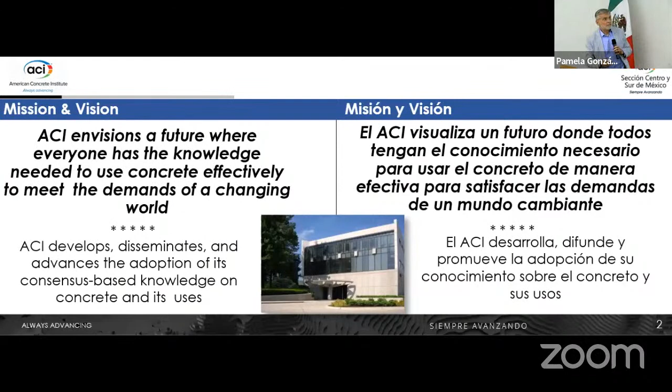ACI is a technical society. We are not a trade association. Even though I have lots of friends who are in the cement or concrete business, and actually I thank them for their support, we are not pushing concrete as a material system. We push knowledge. This is what makes us different from other groups.

We are not a government agency. You are part of an organization that is all about generation and deployment of knowledge. So this is fundamental for me, and this is really what excites me.

Maybe this is one of the reasons I was mentioning to the students, I've been attending conventions since 1985, and I only missed one. So I invite all of you to Boston. It's a great city, it's going to be during Halloween. It's not a bad place to be. And the weather is going to be a little colder than here, but maybe you can see the first flakes of snow there in case you have never seen one.

It's a big institute. We have 18,000 members, 18,000 plus, without counting the members of the chapters. If you're a member of the chapter and not a member of the main organization, we don't count you as a number, but you are still there and you're a key representation of what we do as an institute.

We also have 15,000 students as members, and membership is free, not because we're generous, but because we recognize the fact that the students are the future, not only of the institute, but of the entire industry that we represent here. Just to give an idea, we have just about 350 student chapters and more are coming. So we are very excited.

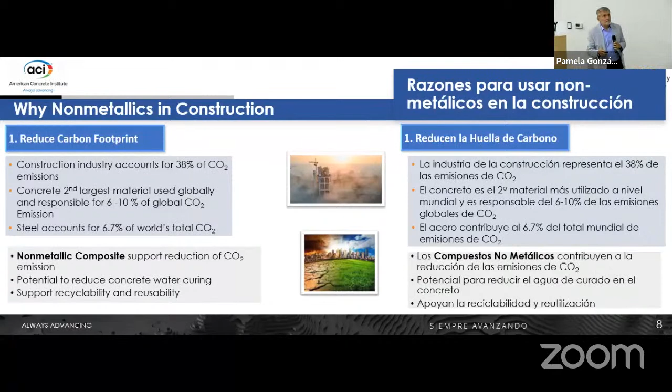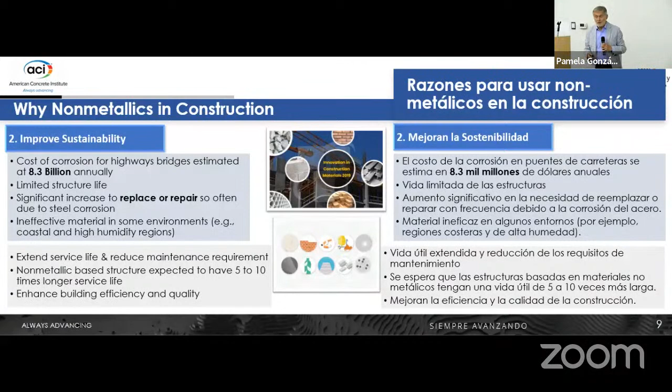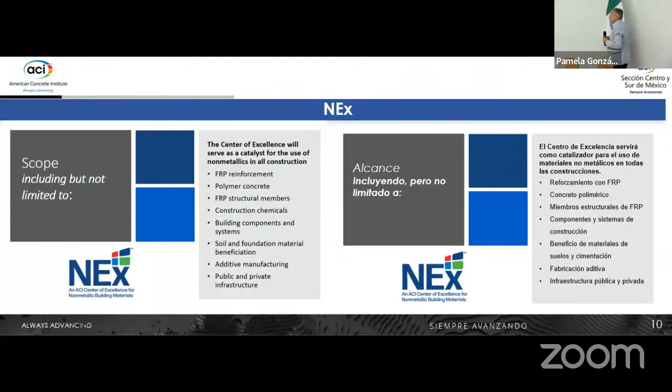So this is one of the reasons why we think there might be room for materials that are different and will allow us to build with a service life of 120 years, which is our objective right now. This center of excellence called NEX not only deals with composite rebars - what we call FRP reinforcement, my personal passion - but also polymers in concrete, additives, construction chemicals, soil materials for soil amelioration, all the things that non-metallics can do. So it's not just that.

The other thing that I think could be exciting, if there are academicians and students in the room, is that through the center membership, we fund research. Last year, we had 12 projects and invested close to $600,000. This year, we are close to $750,000.

Yesterday there was an announcement, if you receive emails from ACI headquarters, that said we opened up a request for application, a request for proposals on 13 themes related to non-metallics. Everybody can contribute, you don't have to be in a research unit. You can be in industry, a contractor, an engineer, or obviously in academia.

The second one, in terms of age, came after NEx, and is called NEU. Here the theme is, I think, perhaps the most important issue we are facing today as a society, not just as an industry but as people, as consumers: a Center of Excellence for carbon neutral concrete. So here are the efforts we have. Are we doing research on this theme in this center? Not really.

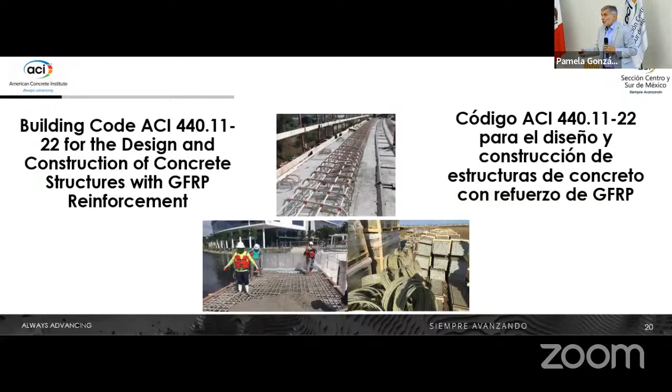And actually, I'll tell you even more. Two weeks after ACI published this document, after a major effort, ICC, the International Code Council, decided to adopt it in IBC, the International Building Code, the Model Code. This means that this document will be part of the law of the land in the United States because the 50 states use the IBC as the model code. So in any country using the model code, this is also the law of the land starting next year. So why do we do this?

I mean, it's kind of obvious, like I already mentioned. We have used many ways to slow down the degradation of reinforced concrete. We have looked at additives, additional cover, we put membrane, we have coated the steel, but corrosion unfortunately happens. It happens because we have chlorides entering the concrete, and because of carbonation of the concrete, among other reasons.

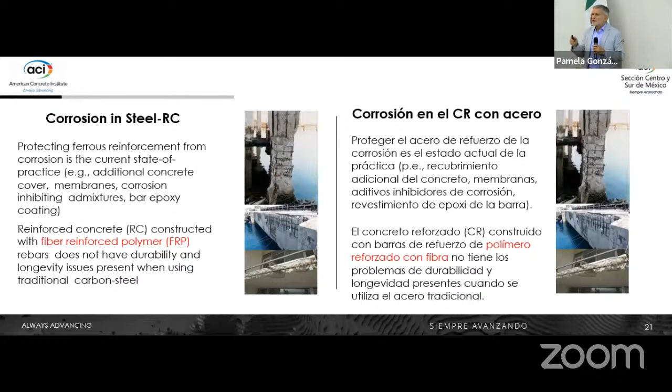So now we say, well, why don't we use these FRPs, fiber reinforced polymers, to give us a solution? It's going to be another tool in the toolbox. Today we are using primarily, at least this code speaks to, material systems made of E-CR glass fibers, which are corrosion resistant electric glass type. We're using a thermoset that is a vinyl ester, but the new ASTM will also open up to other material systems.

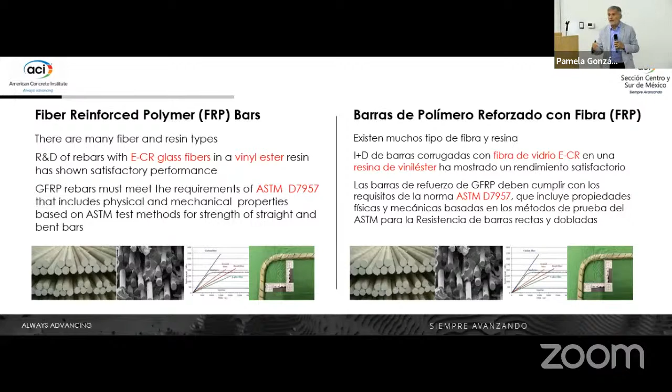But today, the 440.11-22, the code that we issued last year, refers to a material specification that is D7957. So now we are blessed by the fact that we have a material spec, we have a code, and also we have another document, 440.5, that is a construction specification. Material, design code, construction specs - we have closed the circle.

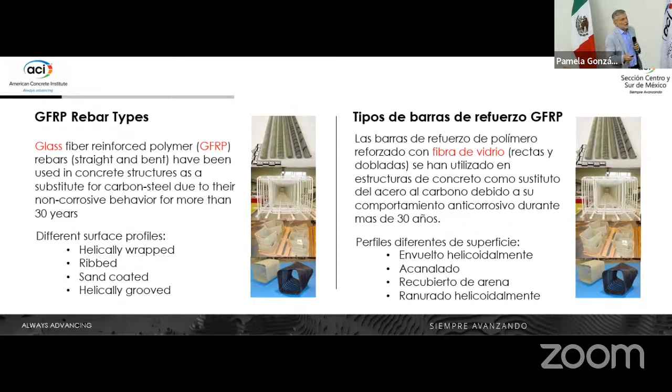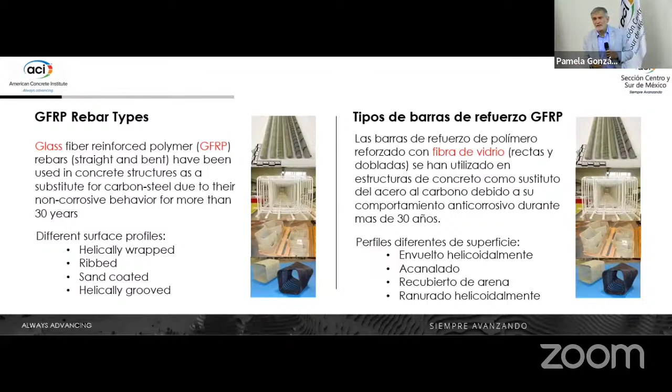The bars kind of look different from the ones you are familiar with. They all look different depending on the supplier, because these manufacturers have not standardized the surface configuration. But all these bars, if compliant with the ASTM D7957, provide adequate bond.

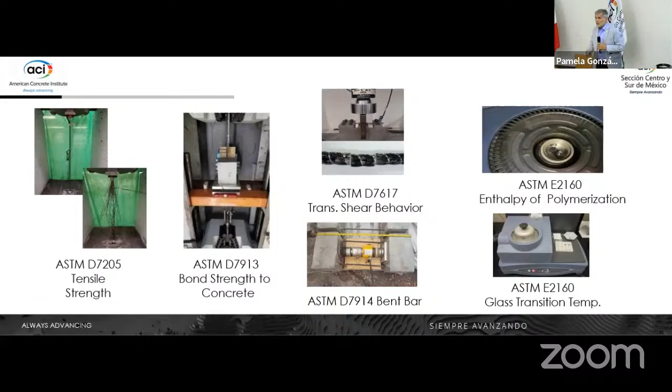In order to make sure that these elements are consistent or compliant with the code, we run a series of different tests, and I'll list some of them. Some may not be familiar to civil engineers, like enthalpy of polymerization. What does that mean? Well, in simple words, if you're baking a cake, you want to make sure that it's cooked - that's the enthalpy of polymerization. Because if the polymer is not fully polymerized, it will absorb water and you will lose the durability that otherwise you would have with proper cure.

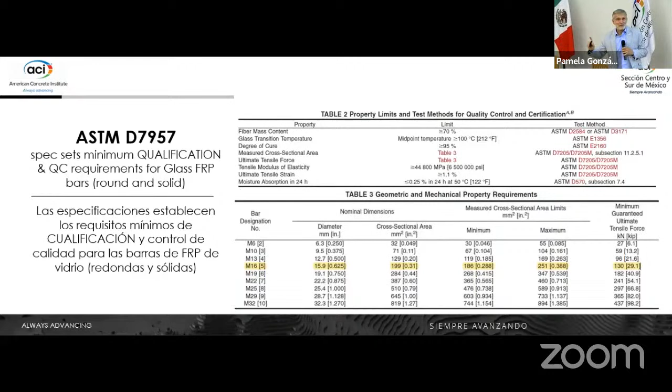This ASTM D7957 prescribes many things, including the size of the bars. So not only the strength, not only the constituents, but also the dimension of the bars. I could spend the afternoon telling you why, but I'll skip it because today I'm emphasizing the good part of FRP, and maybe you will ask some questions about the challenges.

It's a material that has high tensile strength but is less stiff than steel. Let me just use a number here - if you think of steel, FRP gives you a stiffness that is a quarter of that. The implications are significant in terms of serviceability, but we can live with that. In terms of strength, if you take a grade 420 MPa steel, the bread and butter of our industry, we have a strength that could easily be 2.5 times that, but the stiffness is less.

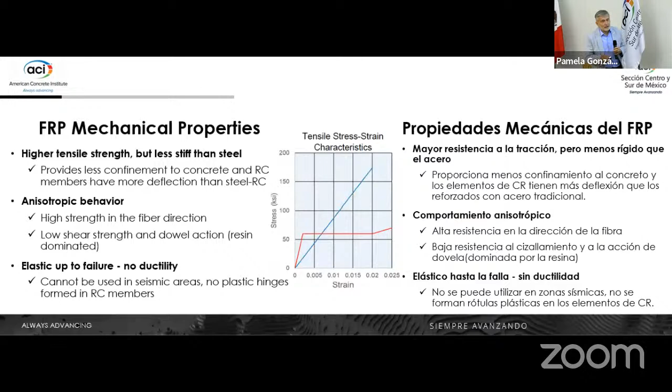It's a material that is anisotropic - properties in two directions are different. And there's a very important property: it is elastic to failure. These have implications, which I'll show in a second, if you go into seismic design, that is obviously of significance. The strength of the bends is less.

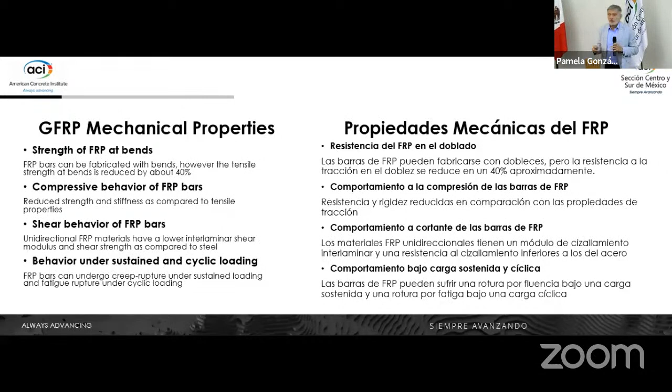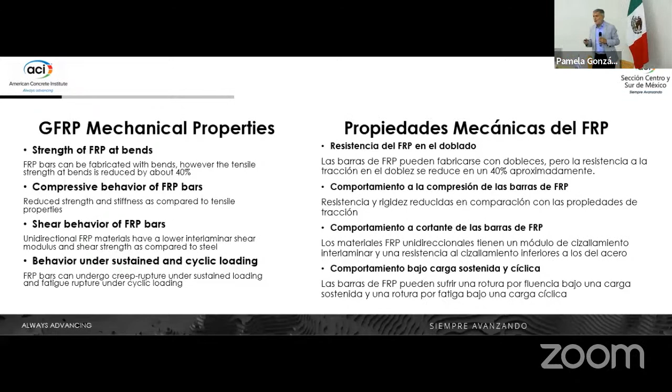This is perhaps one of the weakest points. The compressive behavior is also less than the tensile, and the shear behavior is different than you're used to with steel. Under sustained load and cyclic load, we have a phenomenon called creep rupture. What is the point I'm trying to make? Nothing is perfect, but as engineers, we can design and we know what these properties mean to us.

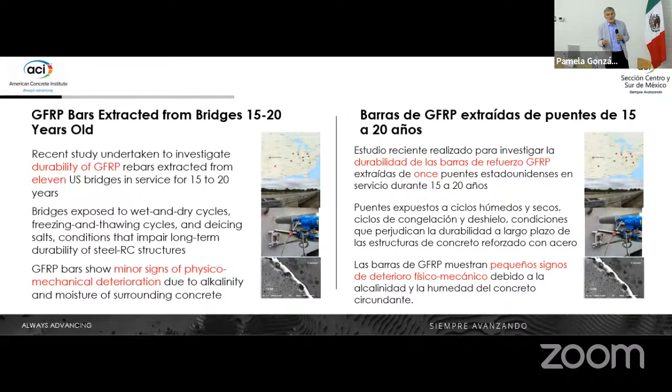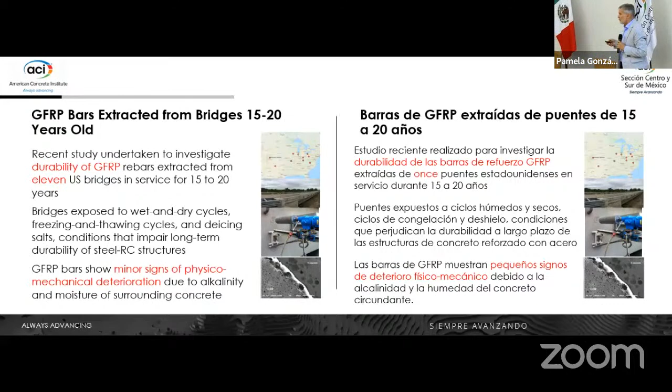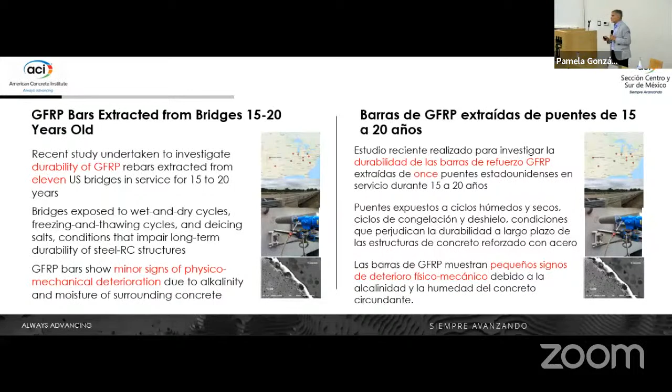The other thing we have done over the years, because there was a question about durability, we have run tests on samples that came from bridges that had been in place for at least 15 years. We have demonstrated that there is really no degradation of the GFRP bars, even though in those days the fibers were E-type, not ECR, and in many cases they did not use a vinyl ester, they used a polyester, which we no longer use.

So this is the code. It's a great document. I hope that you will eventually put your hands on it.

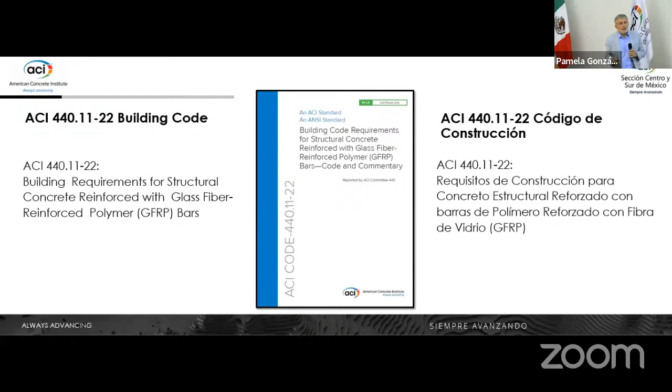It's relevant because it will open up a new set of opportunities for both designers and contractors. As a code, the primary objective is minimum requirements to guarantee safety. This is the objective of every code.

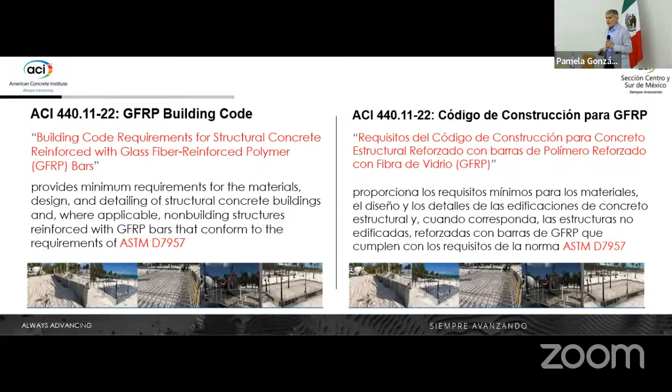As mentioned before, it is related to bars that conform to the requirements of D7957, so compliance with the material spec is a requirement. If there are bars deployed in Mexico that you'd like to use, ask the supplier if there is compliance with ASTM D7957. If not, you should not use them.

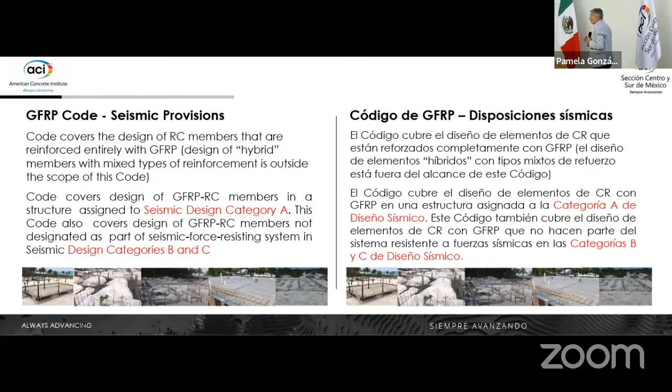The material is linear elastic to failure. When I was with Professor Alcocer this afternoon at UNAM, I said this seems to be a problem, but it's not really a problem. Not always is ductility what we really need. There's a movement noting that ductility resulting in very high levels of damage after a seismic event presents dramatic challenges for repair and rehabilitation. So designing with materials that are linear elastic could open up a new world of opportunities for us.

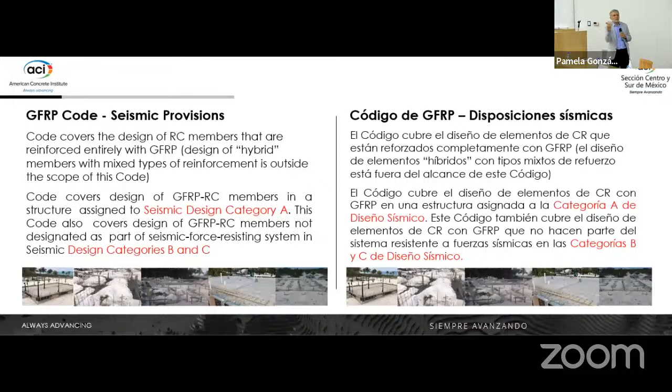But as of today, we recommend using this only in seismic zone A, the one with the low level of seismicity among the four seismic zones, A to D.

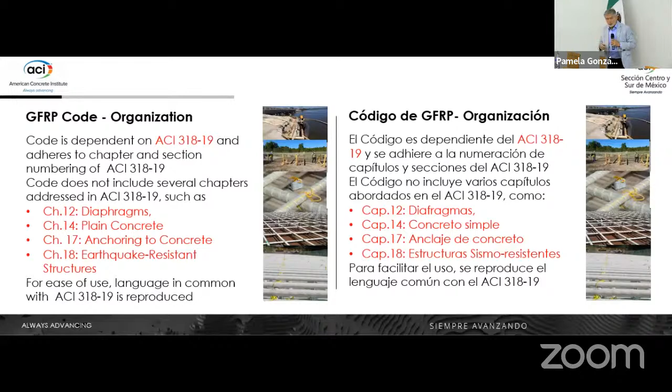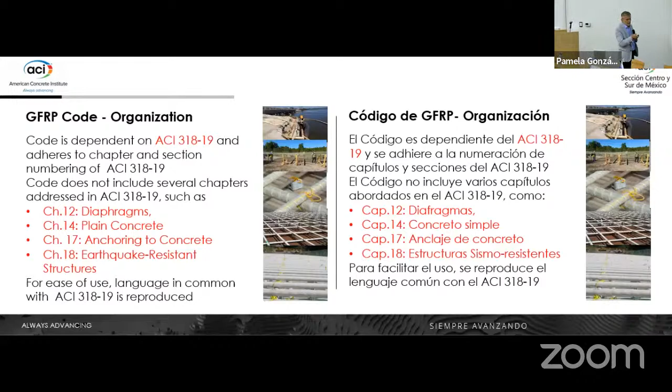The code covers the same structure as 318 for those familiar with it, but skips some chapters. I'll mention two. Diaphragms: we don't have enough knowledge about diaphragms, there hasn't been sufficient research on it, so the code is silent on it and will say not applicable. And plain concrete, which is already covered in 318 - why rewrite it? So this is not a limitation, but something you need to be aware of.

I want to stay on this issue of ductility, but we're now thinking in terms of deformability, giving the same premonition to failure with deformation rather than plasticity. We've calibrated the safety factors, the phi factors, the strength reduction factor, to give us the same reliability that we have with conventional structures.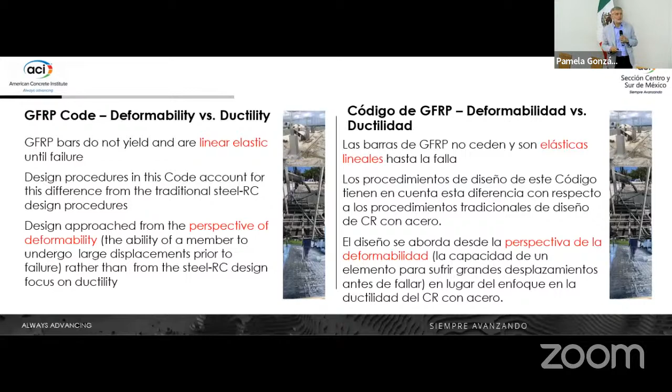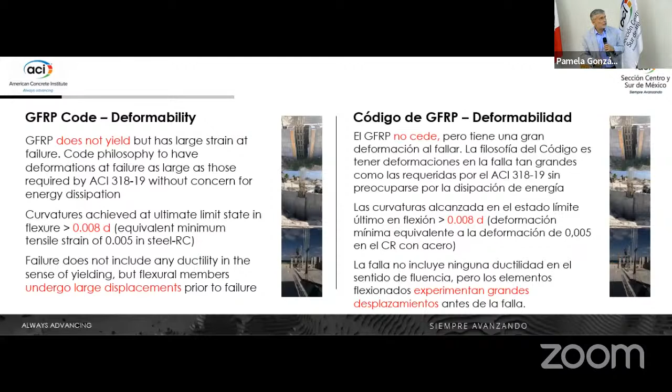I'm not going to go into details here, this is more for the designers, but I want to make sure you understand that even though the materials are linear elastic to failure, the safety remains the same, if not higher, than in the case of traditional structures.

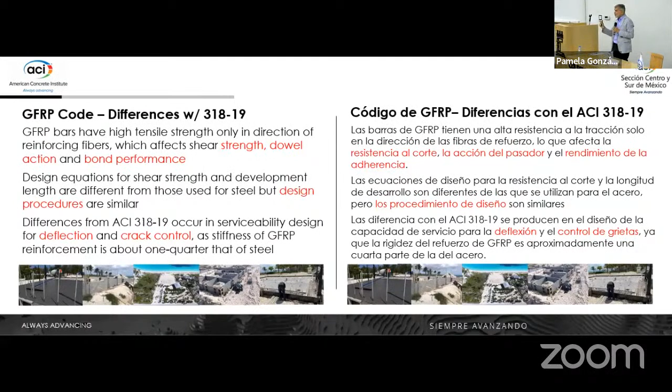I mentioned differences. When you design with FRP, you need to be aware of some peculiarities of the system, in particular items like shear strength, dowel action, and bond performance. And because stiffness is less than in the case of steel, serviceability in terms of deflection or crack width could sometimes be an issue.

The last item: in order to be accepted by ICC as part of the International Building Code, we became silent in this version of 440 on the issue of fire resistant ratings. The reason is we did not have enough tests conducted according to ASTM E119 to present to the building official. This type of work is going on right now.

In some instances, the performance of a GFRP RC structure is better than one with steel RC. Why? Because at 400 C, the stiffness of steel is gone - the E of steel, the modulus of elasticity, goes to zero or decreases significantly. If you have a structure reinforced with GFRP, what happens at 400 C? The resin melts or degrades totally, but the fibers are not degraded. So if you have continuity in your structure and reinforcement, and you anchor the reinforcement, you remain intact. We're doing work in tunneling that is really amazing in terms of safety under fire.

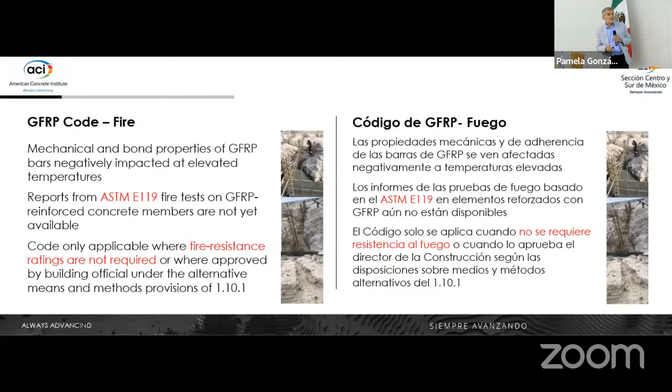So this is not a challenge, I see this as an opportunity. The only other thing I want to show is that we are so conservative now that we even apply a reduction factor, what we call C sub E, to the value of the guaranteed strength that comes from the supplier. By the way, that guaranteed strength is the average minus 3 sigmas - let me repeat, the average minus 3 sigmas.

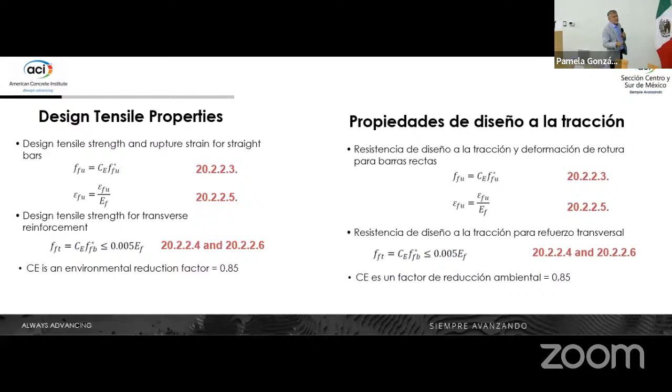And to that, we also apply this C sub E factor that in the case of the new code, we move it from 0.7 to 0.85.

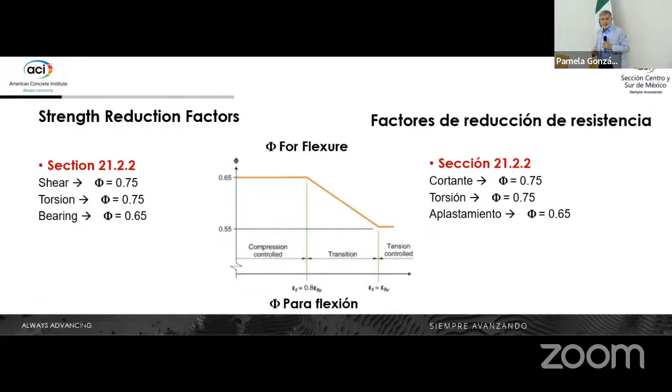The phi factors, and that's the last one on the technical side: we go from the conventional zero in flexure... in shear it's the same, but in flexure we go from 0.9 down to 0.65, and 0.55, also because we allow failure in compression, which is unheard of in the case of flexural elements. Obviously, we allow failure in compression in columns, and that's why the phi factor in that case is 0.65, and it degrades to 0.55 if you have a failure in the FRP itself.

So in columns, we're even more conservative. We disregard the stiffness of the rebars and replace them with an equivalent area of concrete. And again, we also limit the tensile strain because we want to maintain the deformability to acceptable levels.

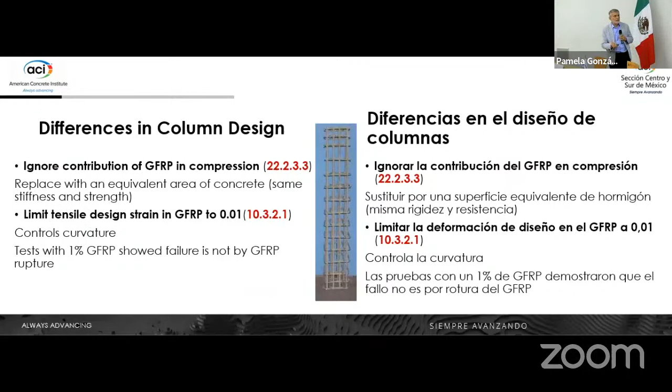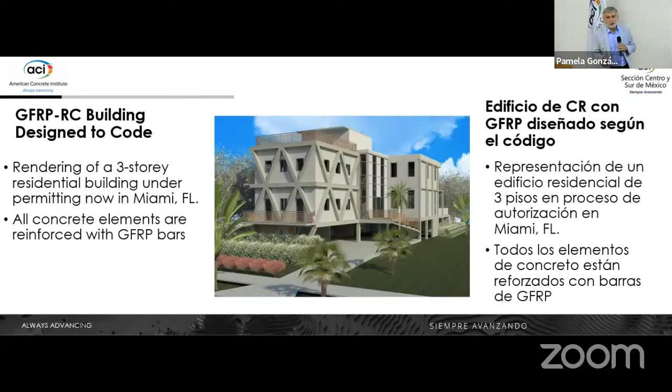I don't know if I showed you this last time, but this building is under permitting in Miami. It's certainly not iconic. I know we are in the home of architects, so I'm not going to take any credit on the design. I did not design it in terms of architecture, but this building under permit is a 3-story building, does not have a single pound of steel in it, and will be built hopefully starting the fall.

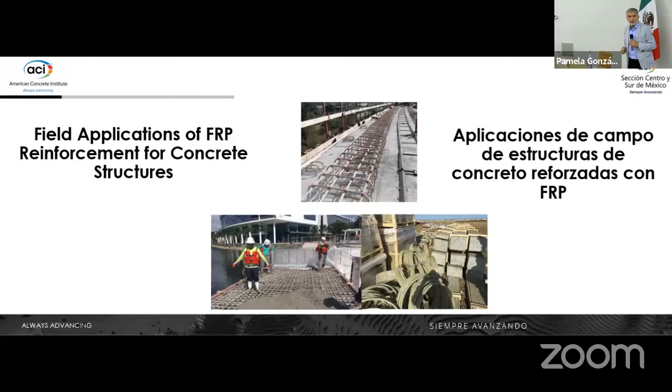I just want to give you a sense of some applications. These are hopefully the last part of 3. These are for real, stuff that I've personally been involved with. I'm going to use the term 'we,' but it's royal we. In some instances I did not really have a very significant contribution, but certainly I worked on these items.

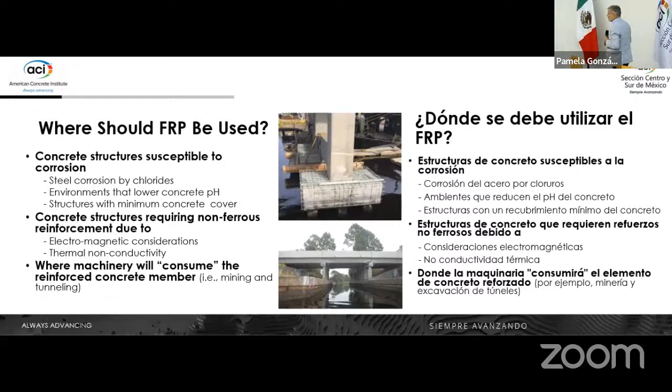Where is the use of FRP? Obviously, I mentioned it before. The obvious one is concrete structures susceptible to corrosion. You probably don't do many of these, but they do exist. If you want electromagnetic transparency, this is a material system you can certainly use.

I'm not going to mention it later, but for example, in the precast industry, there is no corrosion in FRP, so you can cut down the size of the cover and only have the cover necessary for bond. So you can go from 39 millimeters maybe to 20 millimeters cover. In a panel that is maybe 150 millimeters wide, if you can shave 25 millimeters, do you know what this means in cost savings? I'm sure the cement manufacturers give me dark looks, thinking they're going to sell less. No, they're going to sell more, because we can make more panels.

And then we increase the radius of transportation. It's all about weight, and FRP, by the way, is 1/4 the weight of steel. Do you know what this means in terms of transportation of rebars? Do you know what this means for the backs of the workers? The workers' unions in New York City love this. Why? Because people will get fewer injuries over time. So again, these are benefits that we engineers, or academicians in particular, don't really consider, but they do exist.

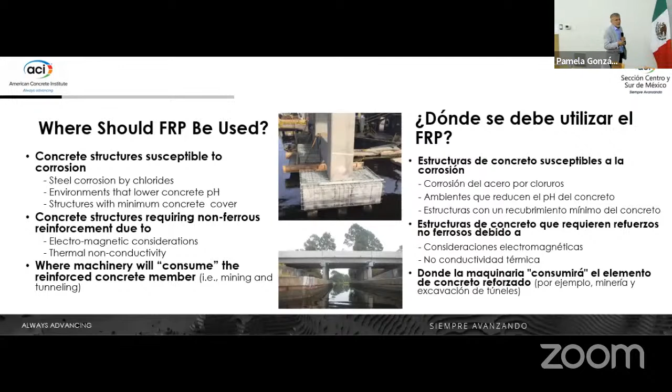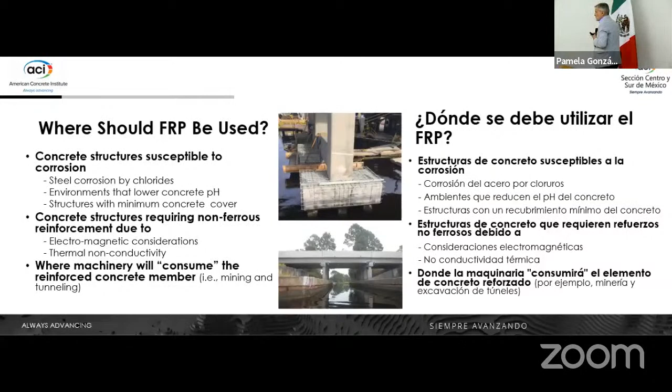The other application is now used 100% worldwide. I'm sure you do some tunneling work in Mexico. When the TBM, the tunnel boring machine, enters the wall that allows the confinement of the soil and needs to do the cutting, what we call the soft eye—if you were to have steel bars, you would ruin the sharpness of the cutters. So the fact that you have FRP and can machine it has become a common thing worldwide, including, for example, the channel that connects France to England, where I had some participation. The FRP was used there in the soft eyes.

So I'm going to give you two of the many presentations that I have, and if you're interested, I'll leave the slide set with the chapter and they can send you a copy. All the others have been hidden, so I'm not going to present them here, but they are available if you create a PDF. So the first one is a little, almost insignificant structure that we built in Miami after a hurricane, because the owner wanted a structure that would last 100 years and resist Cat 5 hurricanes.

Now, this is all precast concrete. And guess what—it was cast using seawater. Okay, we wanted to make a statement. This is kind of crazy. Why do you want to do this?

We have still plenty of fresh water in Miami, but we wanted to make a statement that this type of approach does not need fresh water. The chlorides do not affect the reinforcement. So imagine what this means for you as an industry. You can go back to calcium chlorides as accelerators. They cost less, they are very effective, but we have banned the use of them because of the chlorides.

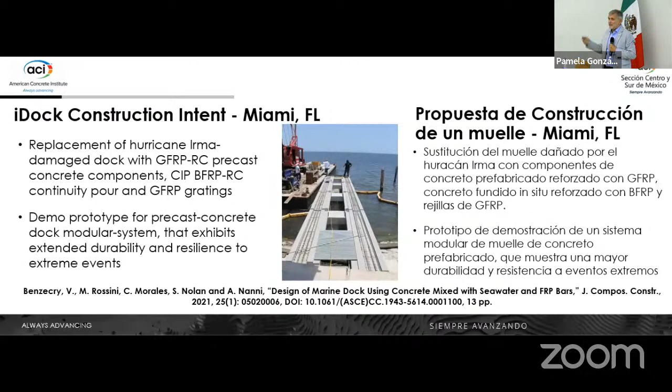So now this opens up another world. You can use recycled concrete that is chloride contaminated. If you demolish a bridge, you can use the rubble to make recycled aggregate, and you don't care if it's chloride contaminated. So all this is in the perspective of sustainability.

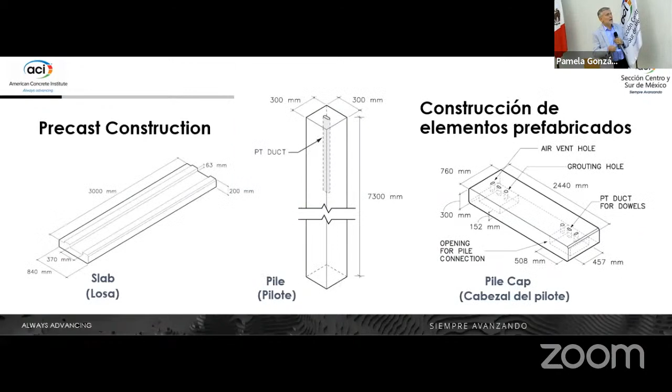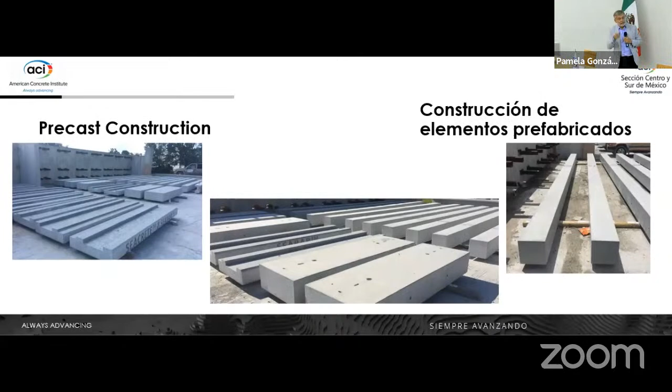So these are the units being cast at Course Lab in Miami. All the elements were precast and then assembled at the site. The exciting part is that the piles were RC, not PC. These are very small piles, but they are the most common and normal in coastal construction in Miami, maybe 24 feet long, square, 30 centimeters. And the installation was with conventional equipment and very successful.

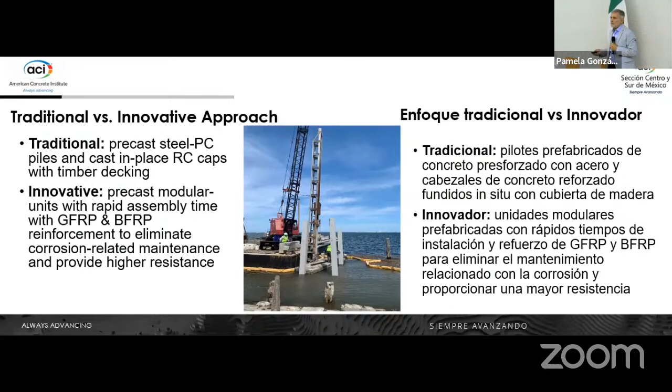In this case, in addition to the glass FRP, we used basalt as well, which is interesting. I know some distribution may happen also in Mexico.

So these are the pictures of the pier, almost with construction completed.

And the owner was so excited that 2 months ago, he just sold the house. You want to know the amount? $15 million. I think that maybe part of it is because of this great pier - no, I don't think that's the case. But we went back to the owner and said, could you give us a little donation since now you have sold the house, but with not much luck.

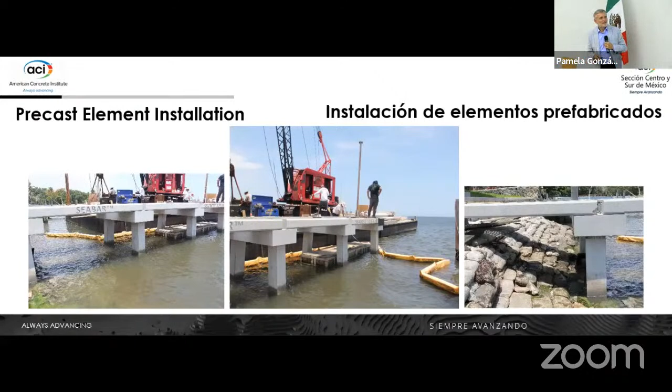The next project is on the other side of the Atlantic Ocean, actually on the other side of Africa. We go to a flood mitigation canal in a new city being built in Saudi Arabia, in Jazan. The reason I want to bring this up is because it used to be, and is now, the second largest project in the world in terms of use of materials, but it speaks to applications that don't need to be buildings, bridges, or piers.

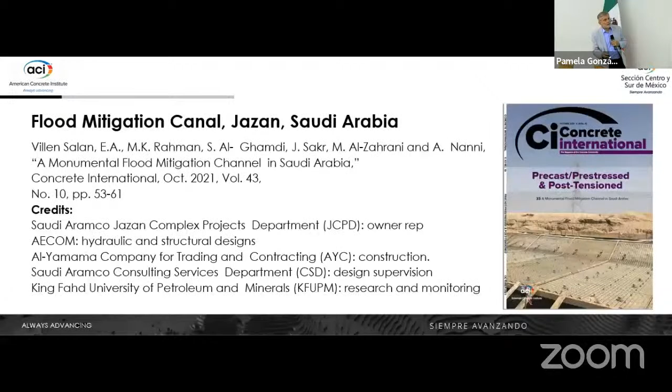It's an area of great interest even now in the United States, what we call pre-engineered application, such as slabs on ground, walls, retaining walls for residential construction, where you design without an engineering seal, but design by using tables. So this is the city - in terms of geography, the city of Jazan is on the Red Sea and is being built really to provide refineries and to give Aramco access to the Red Sea, potentially moving goods both to Europe through the Suez Canal and to the United States across Africa.

And they needed this flood control canal to protect the city along these two sides. Believe it or not, it rains there every once in a while, and when it rains, it pours. But it was interesting - the biggest challenge we had during construction had nothing to do with the rain. It was the sand. When you get a sandstorm, you have to go back and clean up the area - this is very interesting.

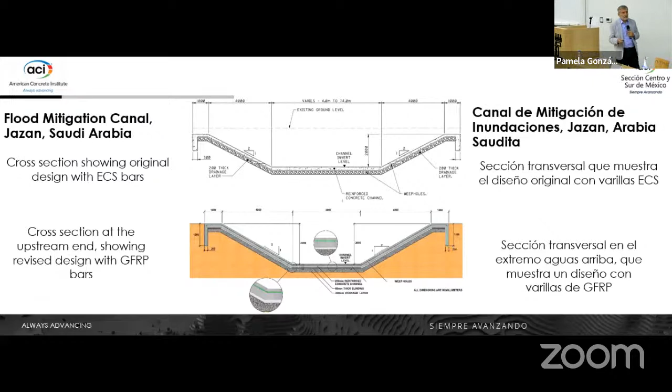So anyhow, this is the cross-section of the canal. It's 20 kilometers long, 40 meters wide, and it was originally designed with epoxy-coated steel. Then Aramco, the client, came up with this brilliant idea - hopefully we had something to do with that - to ask AECOM to redesign it using GFRP rebars. Eventually, together with the contractor, a company called Al-Yamama, they decided to go with the GFRP option.

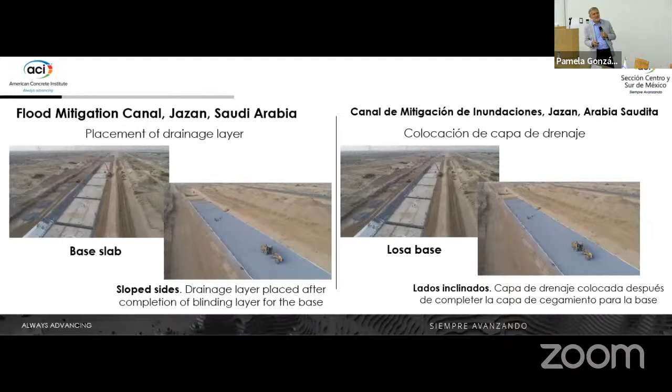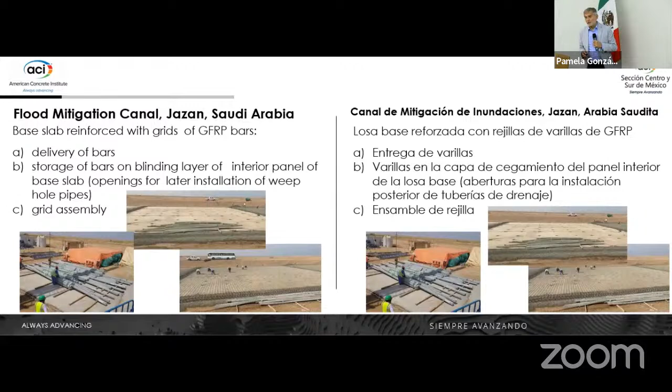Here you see some slides of the construction - very significant, not the prettiest landscape, but certainly very significant construction. You can see here the amount of material. I want to mention this to you: how many cranes do you see at this site? Zero. And the bars were long pieces, 40 foot long. So, very significant - no cost in terms of cranes.

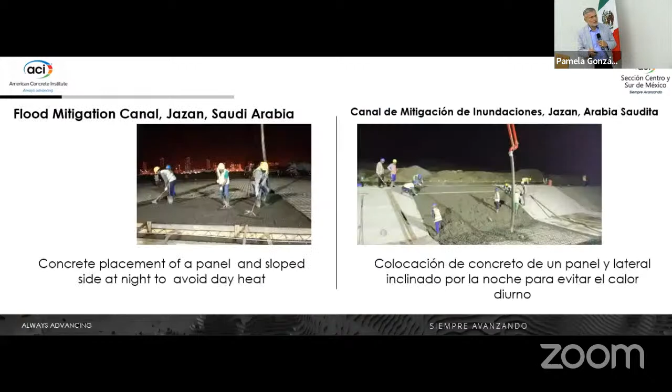Not only does the owner believe, and we believe with the owner, that the life of that structure will be 100+ years, but they save 21% of their dollars. This is a significant amount.

The point is very important here. If you have a first cost of a new structure, of a new technology, that is higher than the first cost of the traditional, you are going to have a very hard time selling it. But not because people are stupid—if I need 2 bridges, and with the amount of money that I would do 2 bridges with conventional materials I can only build 1, would you accept that as the public? If I need 2 bridges, I have to have 2 bridges, not 1. So first cost is fundamental.

And now we are in a situation where the cost of these materials is certainly lower than epoxy coated steel. There was a moment during this past year when it was much cheaper than black steel, because of the fluctuation in the price of steel.

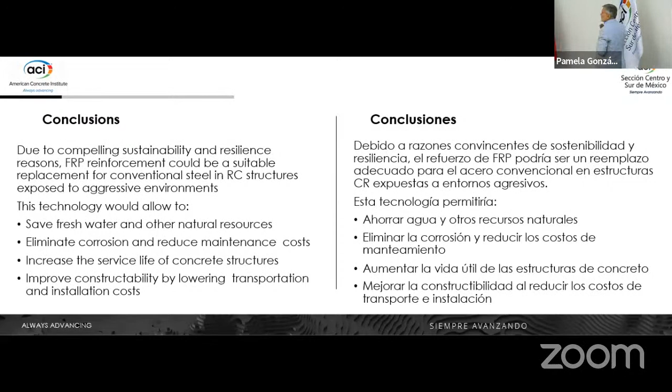So, some conclusions very quickly. I think I ran out of time, but I made the point that we have compelling reasons to believe that we are looking at a sustainable material. The sustainability comes from the major fact that this is a technology less dependent on us providing new natural materials—fresh water, natural aggregate, or mine aggregate. So it's very interesting from that perspective, even as a projection toward the future.

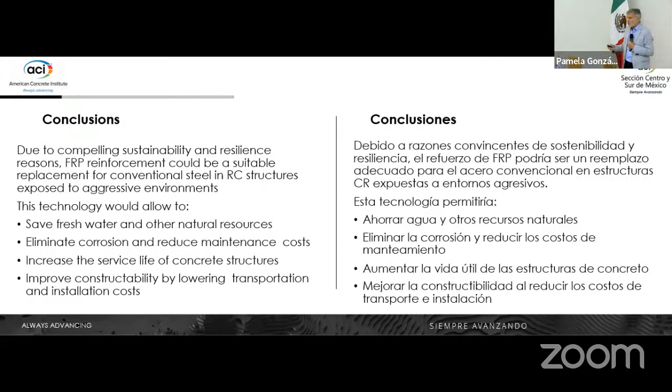It eliminates corrosion, so it reduces maintenance cost significantly, increases the service life of concrete structures, and improves constructability because of the smaller size or less weight compared to steel.